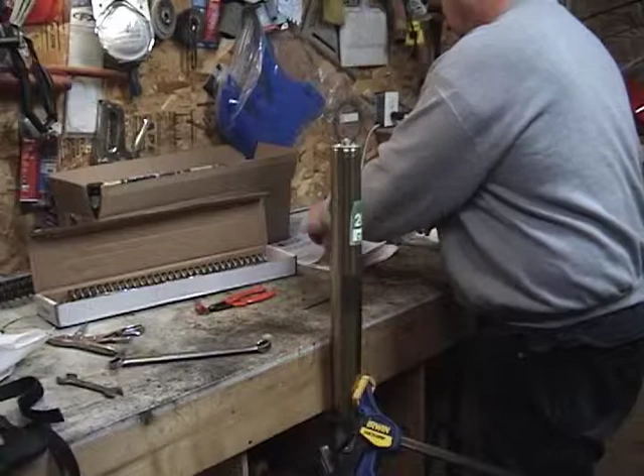The point of this video is multifold. First of all, my new springs finally came, so I'm going to put those in. Second, I made a mistake with the valving, I believe. Let me see if I can point out where that mistake was.

In the base valve, is this the right picture? Yes, is it? That's the rebound valve. Hang on, where's my... I think this is a fork. Okay.

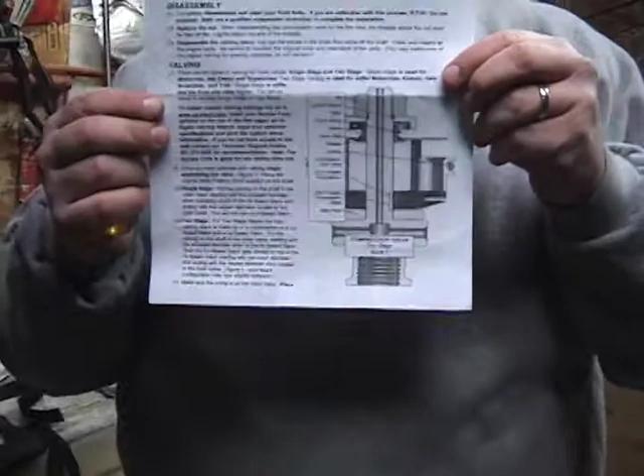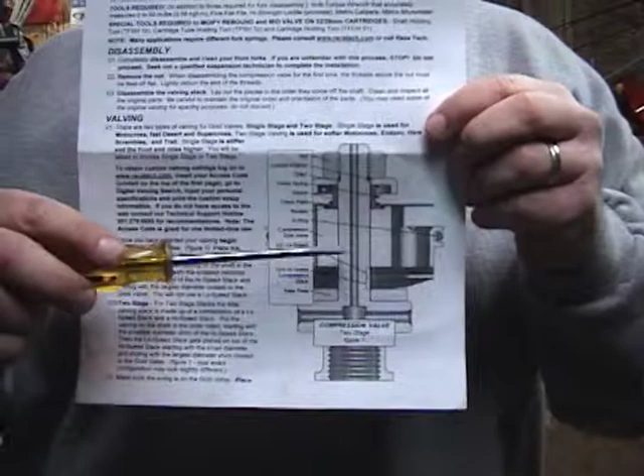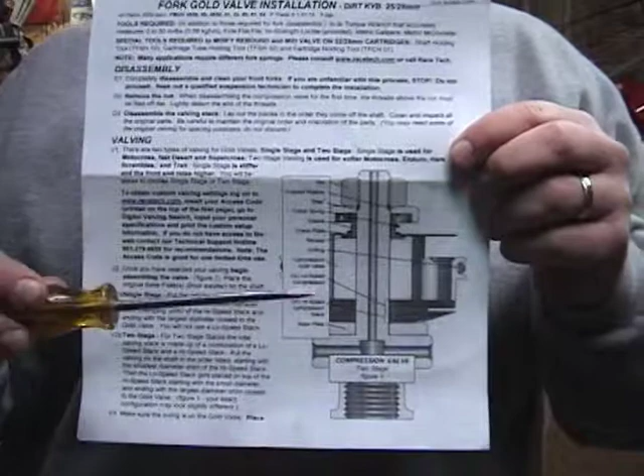In the base valve, there we go. I had to put in some spacers because the shim stack and the valve, the whole assembly, was shorter, the Race Tech assembly was shorter than the factory assembly. So I had to put in some spacers to make sure that all this got clamped in right, but I went wrong in I put the spacers here between this, what they call this base plate, and the shim stack.

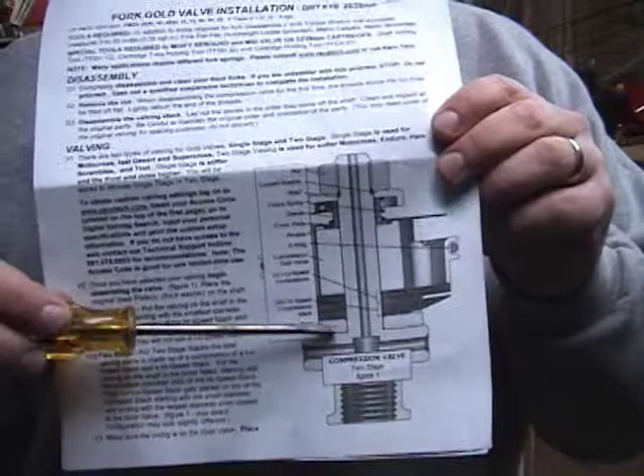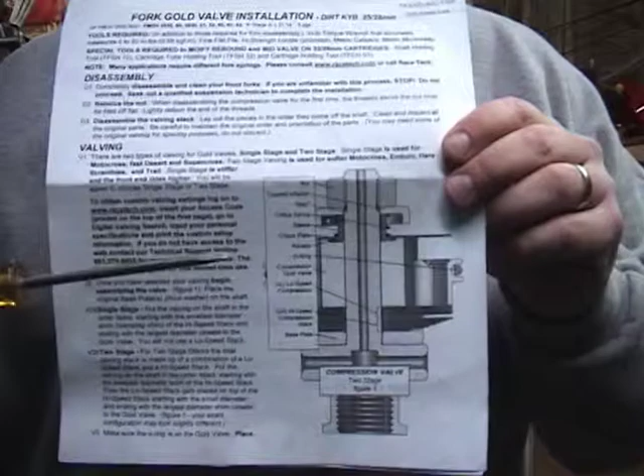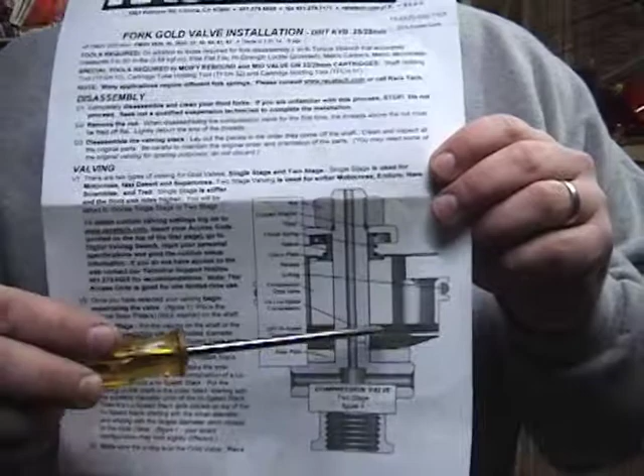And what I had essentially done by putting those spacers there is create a secondary valving that would be as hard as a rock. I mean, I would not have liked this valving. I want the spacers to be in there to space this out, but I don't want the spacers to participate in the damping. That's the thing.

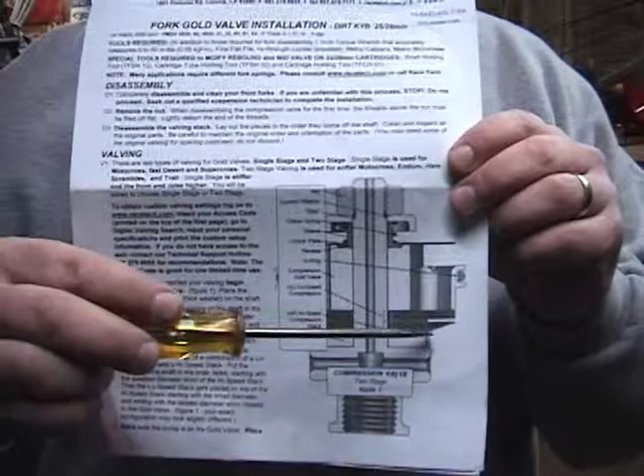So where I put them down here at the bottom of the valve stack, they could very easily have participated in the damping. So I called Race Tech this morning, talked to him about that. That was simply a misunderstanding. The wording of the directions is a little vague.

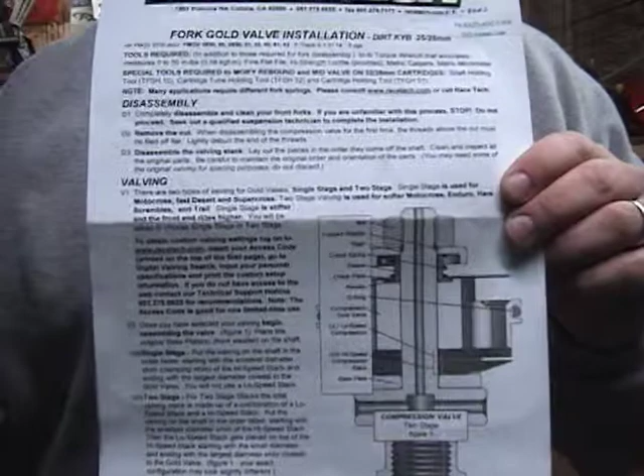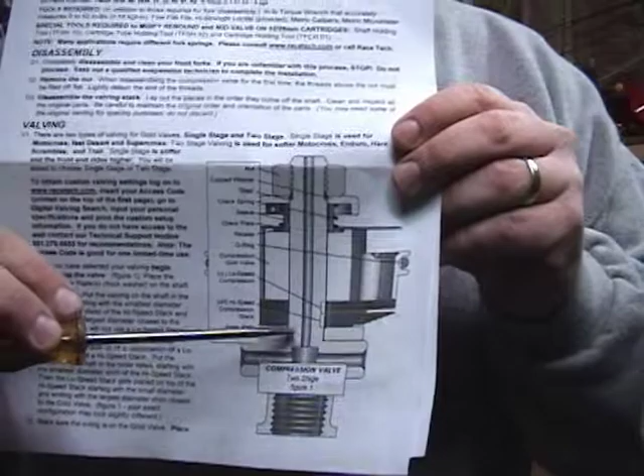I mean, it says, I can read it to you right here. Blah blah blah, to get the proper total valve stack thickness, you may need to place some of the original shims on the shaft just after the base plate. Any shims added must be larger in diameter than the last shim in the stack. So the way the wording, I mean, that's right after the base plate. So the wording is a little bit weird.

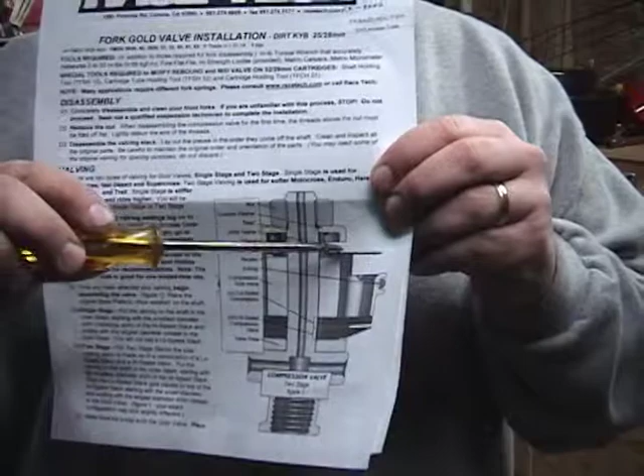So I called Race Tech and we talked about it, and they advised me to put it here in between the nut and this cup-shaped washer. So again, you get the right spacing, the clamping, but the spacers do not participate in the damping.

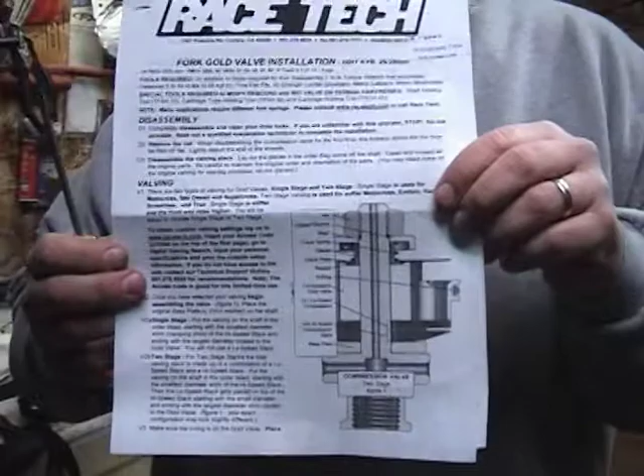Okay, so we want to put in our new springs, fix this problem, and I want to see if I can take out the base valve without having to take the forks apart. That's why we're putting in the springs first. So this will be a fun learning experience. All right, let's get started.

I have my fork just kind of clamped to the bench there, and I'm going to back off this top cap. I didn't put this on very tight because I knew I'd be coming back here and redoing all this when I got my springs.

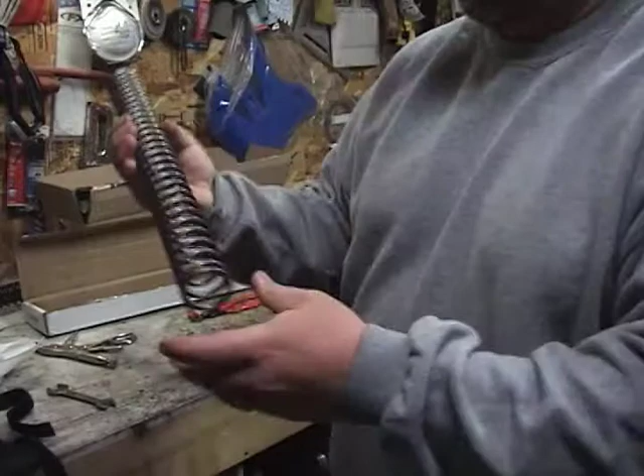Oh, by the way, before I get too started on this, I'd like to point out a couple things. First of all, here is my factory connection spring. They actually have the spring rate written right here on the side of the spring. I wish that it would be etched in there or maybe stamped in, that would make it a lot better, because this part of the spring actually rubs and it can wear off. But anyway, I got 0.49 kilogram per millimeter springs.

Race Tech suggested a 0.55. I thought that was a little stiff. My stock forks are 0.46, so this is, what did I say it was, 0.49. I didn't have major complaints with bottoming of the front. I did bottom the front from time to time. My bottoming complaint was mostly the shock in the rear.

So I wanted slightly stiffer fork springs, but I didn't want to go like Supercross stiff. Oh, and the other thing to note, here's my original spring. It has, I don't know what you call that, where the loops are kind of looped together tightly at one end and I guess not tightly at the other end. I'm not sure what that means, but here's an interesting thing to note. This factory connection spring is an inch longer than the stock spring. Yeah, a whole inch. I'm not sure what that's going to do. That's going to change my ride height. I know that for sure. But we'll see how much fun this is to put in.

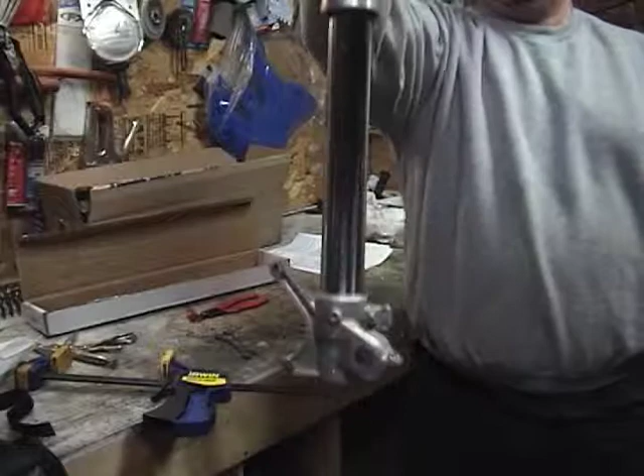There we go, I just put the forks, my spring, my fork is together. Set this over here, I'm going to reposition the camera. Bear with me.